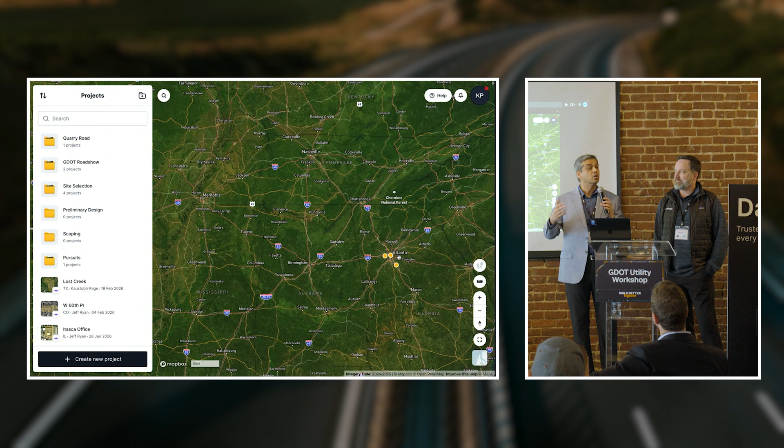We'll start by creating a new project. I heard about a long project in an earlier panel conversation, so I'm going to do a really long road project here. It's not an urban environment—we'll go to one, but this is more like a suburban, long linear project. Let's call it demo, and use this as a design phase for a road project.

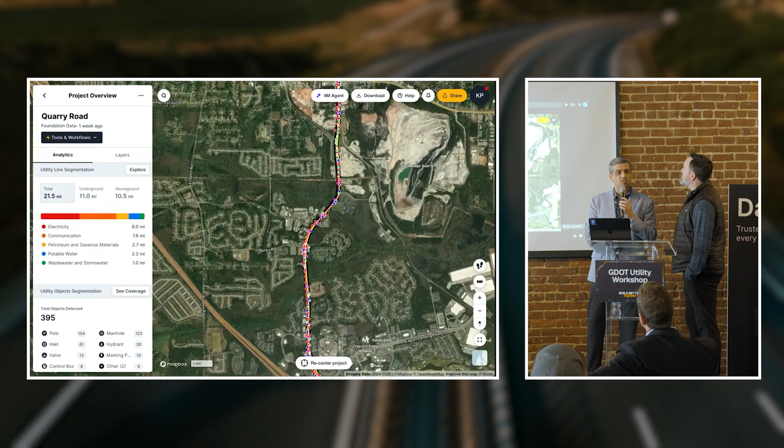Let's look at view utilities. Within a matter of seconds, our utility information starts streaming in, and we further enhance this data by applying advanced algorithms. If I switch to another window, this is how it will look within about an hour. If I zoom in, you can see we're streaming utility lines—different types of lines. For example, I can click here and see that's a wastewater line. Not only lines, but we also have on-surface objects.

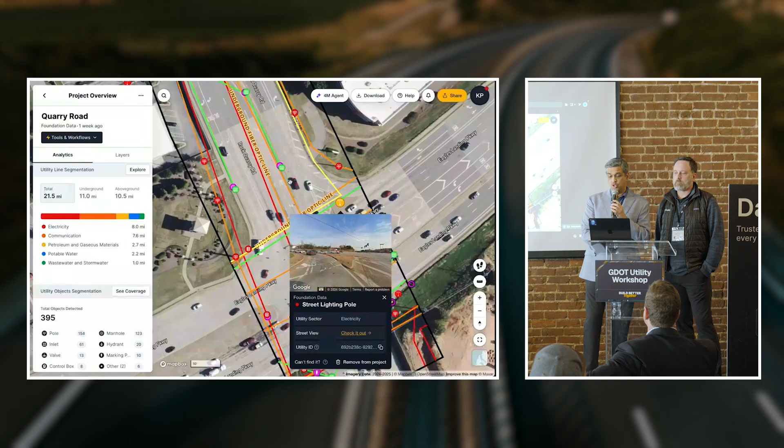So we have this particular pole that's been captured and geolocated. One thing is to identify an on-surface object, but another thing is to actually position that on a map, right?

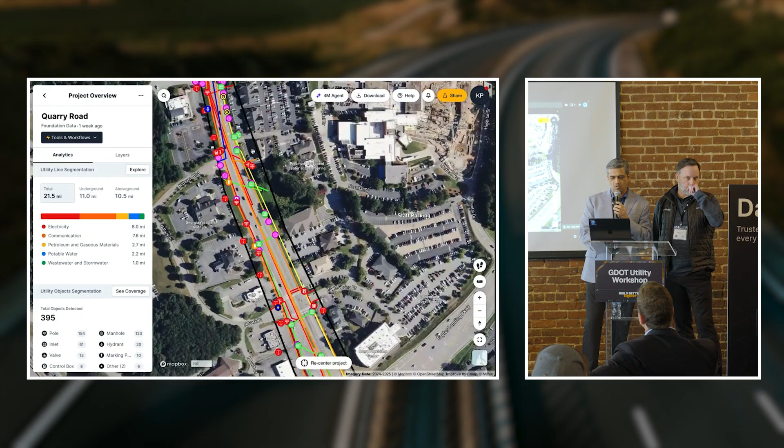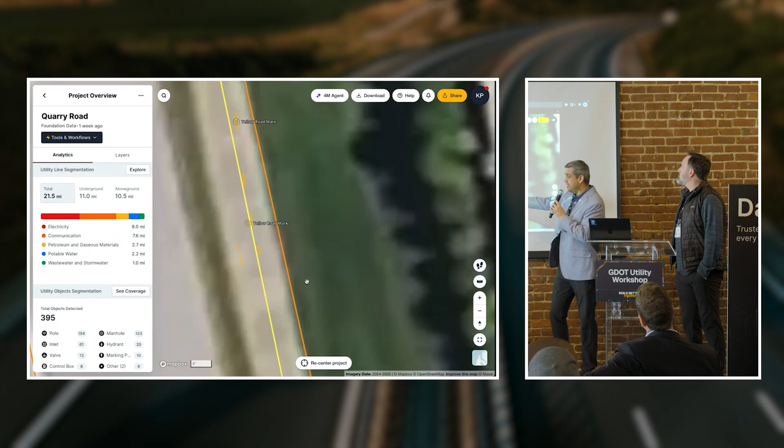Here are a couple of cool things I want to show you. If I zoom out and go to this area, not only are we identifying on-surface objects, but we're also capturing road marks. Here's spray paint, one of the locates you could see as evidence on the map. Not only can you see that in the imagery, but you can also see where it's located on the map. Here's a gas line we collected from our conflation engine. So for this line, as an engineer, I have strong confidence the line is present because I have evidence showing it is present.

We're giving you this level of information in a matter of 1 hour versus waiting for weeks and months. Let me go to utility insights on this one.

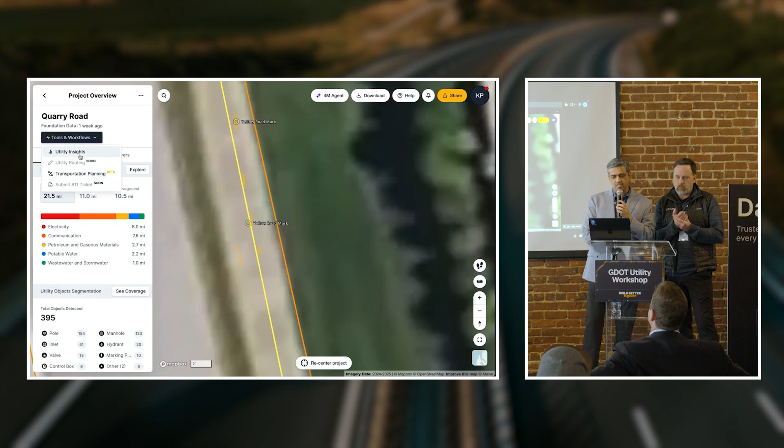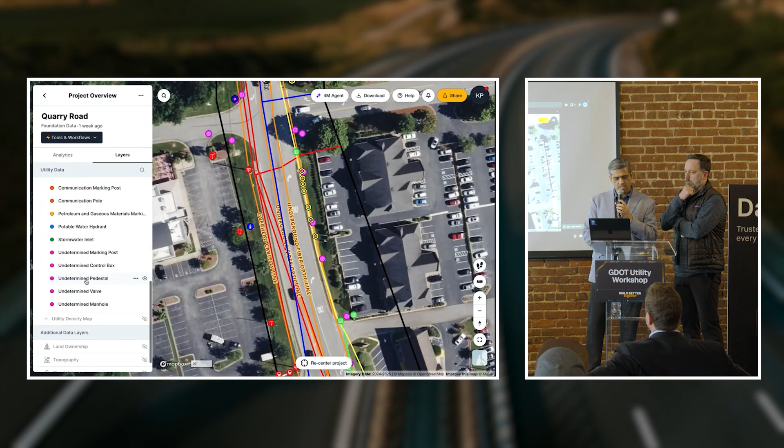Here's our risk analysis agent on this large project I've drawn. I just wanted to understand what the risks are, and our agent identified there's a parcel hospital in that area. If I were just cruising around, I might not know. So let's turn on that layer—let's turn on the land ownership. I did some preliminary investigation and found out that's the medical center.

So a very critical infrastructure—we know how the probable utilities are. If you're going to do any modification, as one of the panelists mentioned, making sure hospitals are correctly maintained and service is uninterrupted, having this information early in your planning and conceptual design is very critical. A lot of DOTs, including Nick's team, have been using the product to identify these risks early in the project concept stage, and in some situations we're seeing the use case evolve, now being used by emergency repair crews and others.

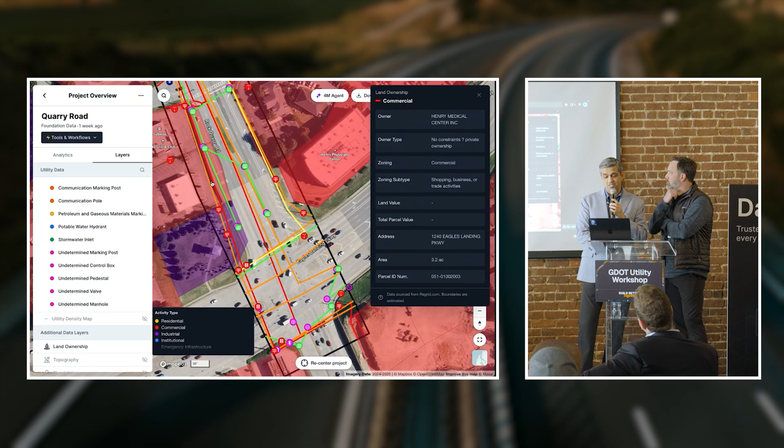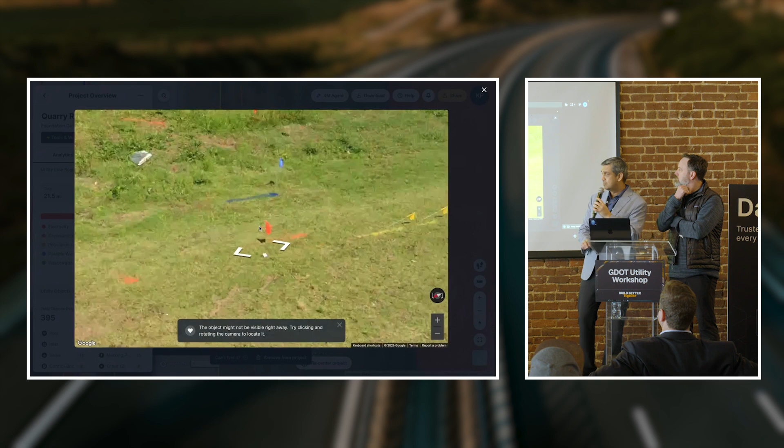So that's pretty much the product, and I wanted to show you a couple more things. As our product evolves, we're identifying more and more objects. Here's a new addition: not only are we identifying road marks, but we're also identifying flags—a small flag on the ground, not only identified through the image but geopositioned on the map. This is one of a kind—no product out there brings you GIS information plus utility objects plus markings all together.

In a month or so, we'll have historic road marks and historic flags going back 10, 15 years. Imagine the maturity and richness of data at your fingertips, at a fraction of the cost compared to doing a full survey, using AI. I think Gen Zs will like this product a lot, that's my guess.

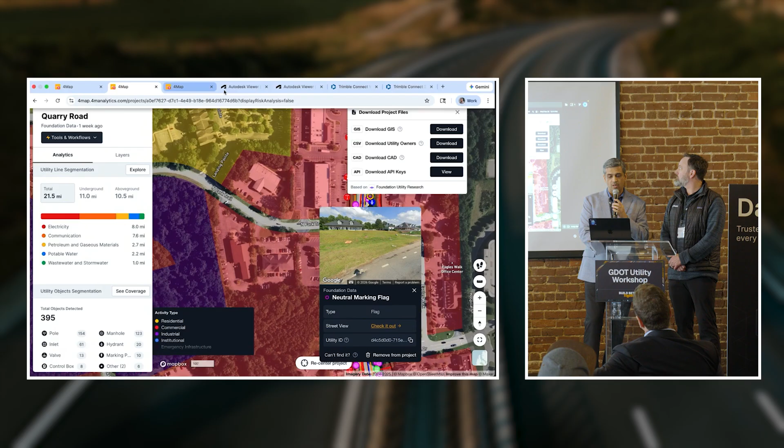On top of the data, we also have a bunch of other options—for example, downloading this to a CAD environment. I can instantly generate a DWG or DGN file that can be taken into design. Again, this is initial exploration; we're not saying start excavating based on this, but start communicating based on this information. So we're working with partners like Bentley, Trimble, Esri, and Autodesk to make sure our data is well integrated into other platforms.

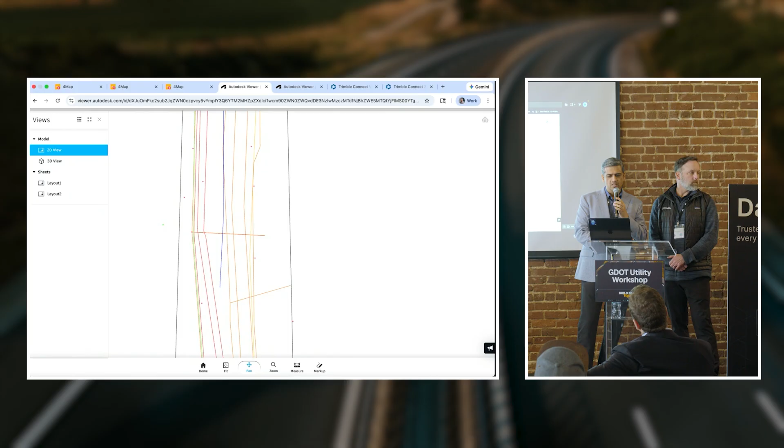Now let's try something on that field investigation use case. What we've developed is an API key, so I'm going to generate a new API key.

Everything is live, so let's see how it works. I'm going to choose a specific folder instead of everything, just a specific folder for Roadshow. I'll put an expiration date for that key, end of next month, so the data doesn't keep streaming for eternity. I'm just going to publish this WFS. What this is doing is creating a publishing stream only for a couple of projects within a folder, not your entire account that's getting streamed.

And now we can copy that, and I'm going to hand it to Darren to show how it works on the Trimble side. Thank you.

What we're looking at now is a platform called Trimble Connect, our collaboration platform. It's the center point between our physical and digital worlds. Trimble's uniquely positioned to speak both languages because we have tools in the field, GNSS equipment, equipment on tractors, excavators, graders, and software in the office that takes that information, generates grading files for those tractors to operate on, survey construction tools. At the center of all that is this collaboration platform called Trimble Connect. One of the really key things about Trimble Connect is it's an open architecture, so we have APIs that we can collaborate and communicate bidirectionally with your systems of record or products like what 4M is offering.

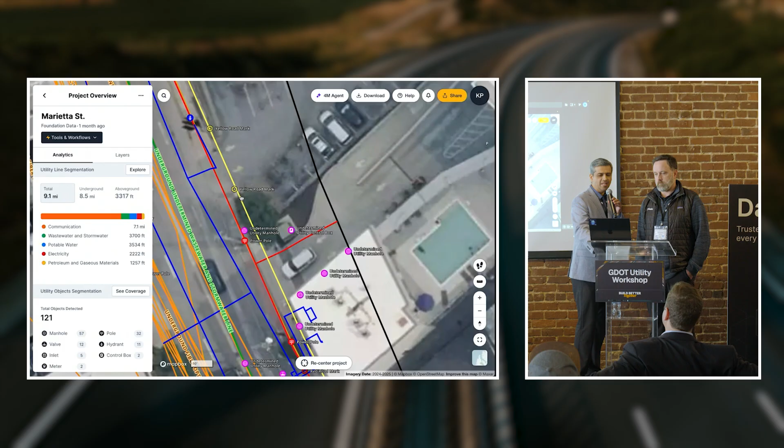Before that, just one thing we want to quickly show is how that project looks in 4M. This is the location where we map that project in 4M. You can see all the richness of the data. You can see the gas line over here, click on that, and find all the information. Same thing, you can find the road marks. You can identify and verify a lot of this information.

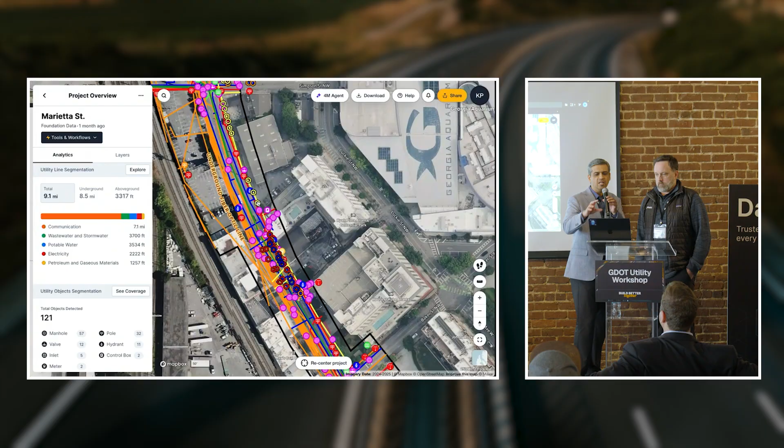What Darren will show you in a moment is taking this information and streaming that on the Trimble side. Sorry. That's a key point, I know. We practiced this before, but you always forget something.

So I'm going to go select our project, we're right out here at Marietta Street. I'm going to give it a name, and I'm going to call it—if I can, I'm left-handed, so this is difficult. Do you want me to hold the mic for you? I got it. We're going to bring that data into Trimble Connect.

What this is going to allow us to do is take this data out into the field with us with the various Trimble tools, whether it's Trimble Access, our survey software, Trimble TerraFlex, our GIS data collection software, or what you're going to see in the field, Trimble SiteVision, an augmented reality solution. We'll be able to visualize not only the location of these lines, but also the depths of them in the field, as if we were uncovering the asphalt and the dirt and seeing those lines.

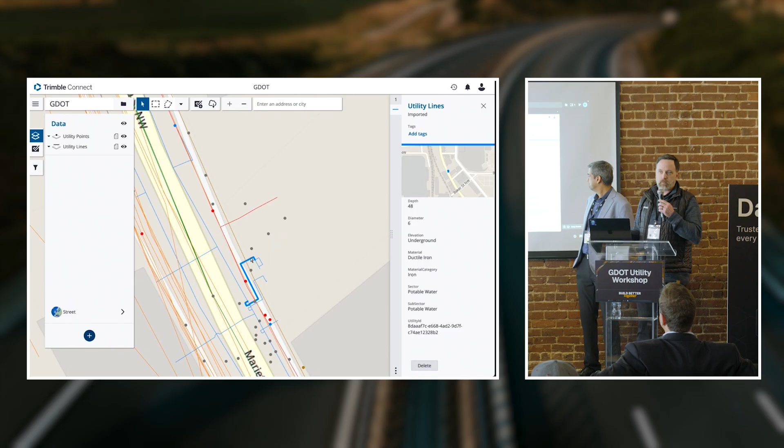So we're going to go here, and I called it—oh, go back one—GDOT. Yeah, there we go. This is, again, in Trimble Connect, which gives all of Trimble's tools access to this very rich data set that 4M is providing. I can zoom in here, and we can see it's the same data, the same attribution. I can click on any one of these lines and see all the data that's been collected in the 4M system.

For this initial exploration of this data set, it's good enough data—we're not digging trenches right now—but we're going to have a crew out in the field right now showing how, as soon as I've connected this in Trimble Connect, our field users immediately have access to this. So we're going to pass this over to our crew outside, Justin and Dan, and they can take it away.

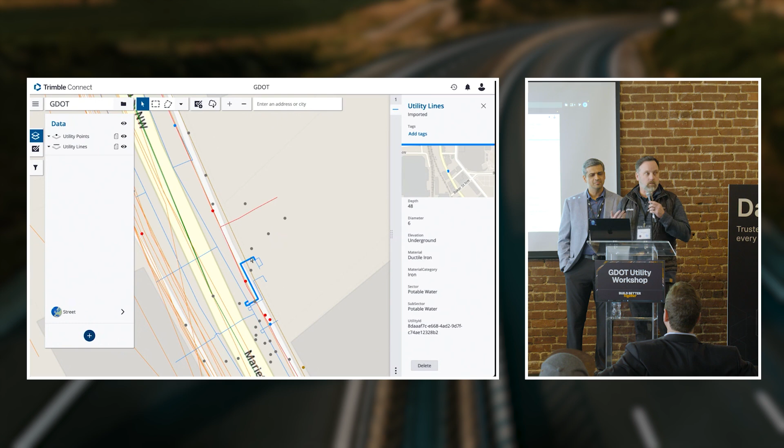There we go, I think perfect, we're live from the field. Hey, thanks for sending all that data through from Trimble Connect. What we're doing is we've loaded it into Trimble SiteVision here today, and our first order of business is just to take a couple of steps with the data loaded and get it to orient to kind of where we're at in the world.

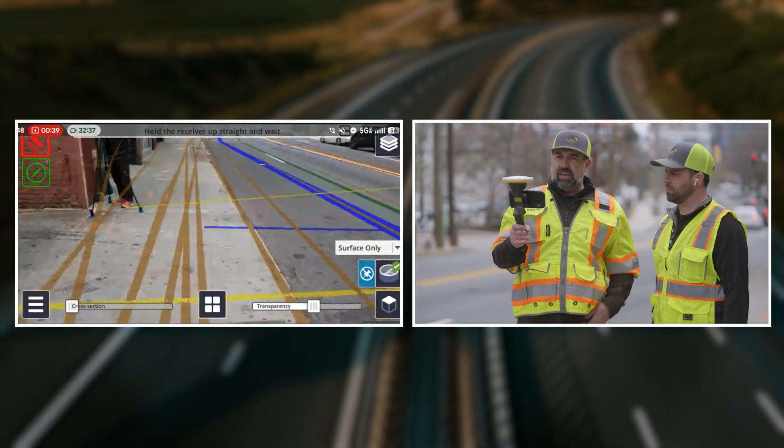And as you can see, as I've walked, the data has all automatically been placed based on the data that originated in 4M is now in Connect. And now we're going to take this data and put it to work with an initial field investigation.

So we have, do you want to show where it goes into the building? You can see this gas line here that goes into the building as well. And then we have some fresh paint marks, but it doesn't really tell the whole story that you see with the data. Once you get the data, you can tell, as we plan a construction project here, there's just not the room to relocate any more utilities over in this area.

So that's something that we can see right away, right when we get to the field, whether there's been an 811 done or not, to get us going right away.

And some interesting things about the technology here is that all of the data is overlaid on the surface, and you can see that. If I change the transparency, you can get an idea of the fiber lines that were identified in the database and their orientation based on the paint evidence that we've got on the ground here. And we can take different views of this, things like a pit view, so we can get a look here as we walk across the street of all the utilities in the right-of-way.

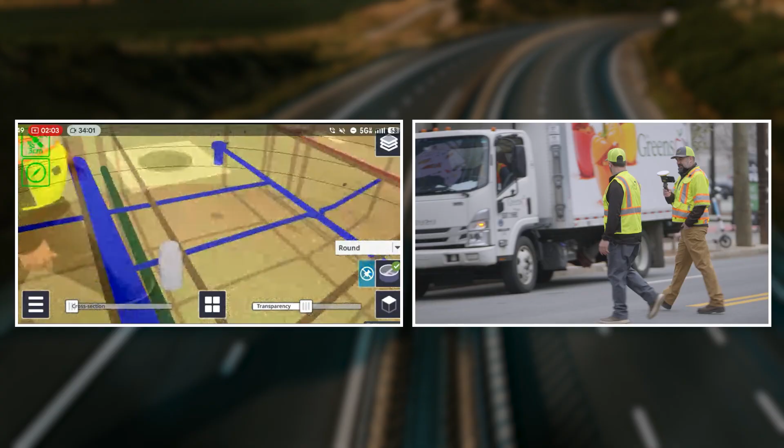I'm going to try to not get run over by a car while we do this. All good here.

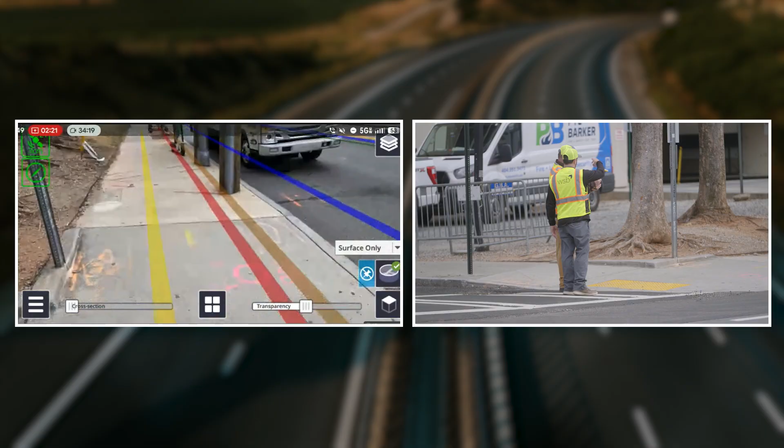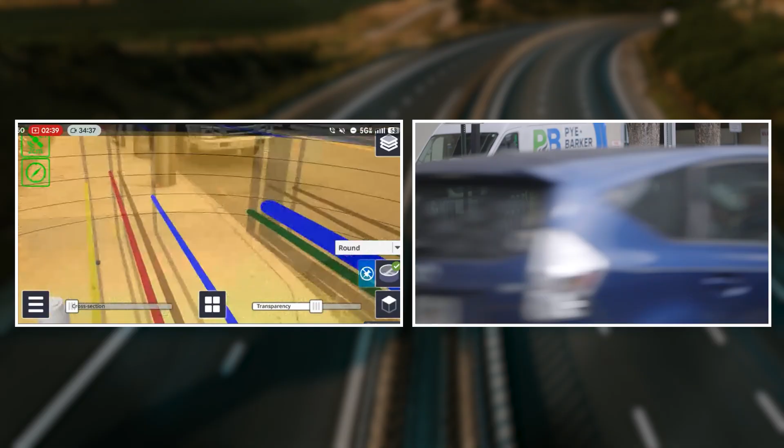We'll flip back and get an idea of more of the utilities here. As we look around, you can see the gas line mark. That's one of the concerns that needs to be relocated. As we can see on the other side, there isn't room. So as we think about this process, it's probably something that needs to be relocated within the road core, potentially, or adjusted, worked around in the field, things like that.

So we'll definitely want more data on the gas line. As we turn, we can see evidence of water, but we don't have any marks out in the field. That's where having this data is so valuable right off the bat, because we can see that there's water lines going through here. So we can add that into our planning just from our initial investigation here.

So in standard demo fashion, we've got a little bit of a freeze here, but there we go. We got everything caught back up.

But SiteVision gives you all kinds of different views on it. You saw the underground view through like a pit view to give you an idea of the vertical separation between utilities, the relative size of utilities from the attribution. We get an idea of larger diameter water or stormwater, so we get an idea of the large utilities that might cause concern or a heightened risk.

In a particular project, Dan, can you just pause at that view for a second? Here you could see the communication marking on the road. Again, from an accuracy perspective, it might not be at inch-level accuracy. Doesn't matter, it's an initial exploration. You can see that evidence, you can see where the 4M lines are. And that gives you an idea, as both of them were saying, hey, if you're going to modify this sidewalk, it has a fiber line risk versus that sidewalk has a gas risk, right? Understanding that is key.

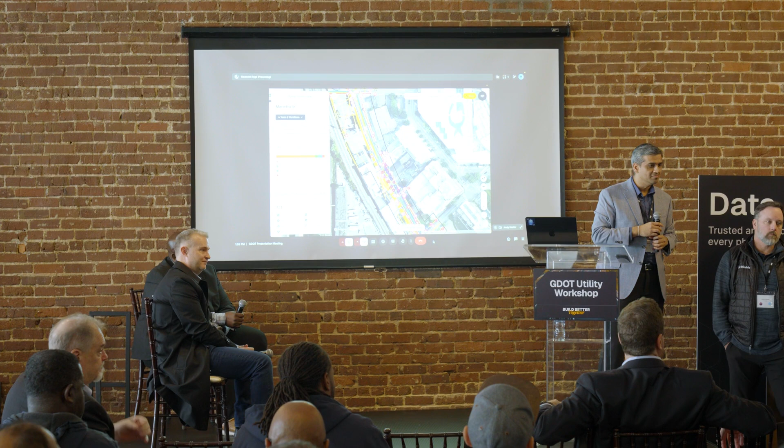Justin: hey, let me piggyback off Aiden. So the marking in the field indicated a duct bank. When it's flagged in 4M, is it just going to say telecom, or would it say duct bank telecom? As of now it just says telecom. It doesn't go to that level of duct bank telecom, but that's something it absolutely can.

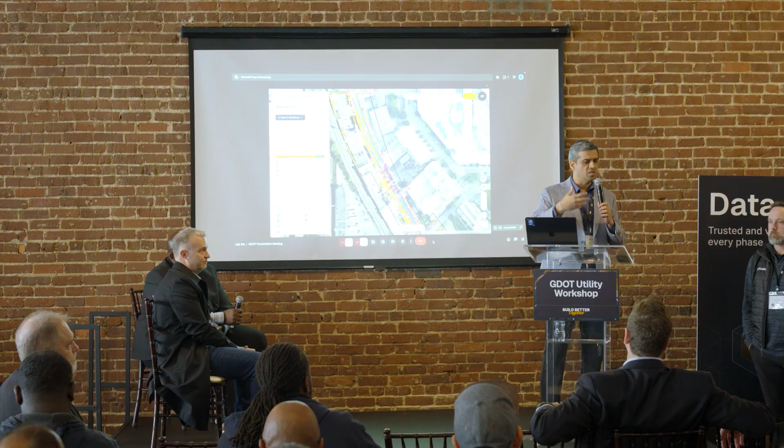So yes, 100%, that's what we're working on. As I was showing you, we have markers and flags now, and our vision and mission is to continuously understand the markings and physical evidences on the ground. So duct bank will be something we'll work towards.

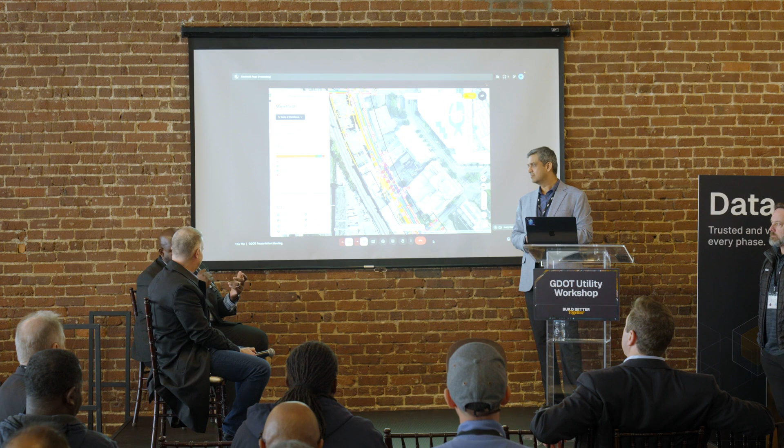I think that's the beauty of SiteVision. If I'm outside, I can see AT&T's vault right there in front of me. You're able to connect the real world, what you see on the ground, with what you see in 4M. It's not hard for the mind to do that deductive reasoning, like 'oh man, this is a vault here,' whether that was part of the initial attributes or not.

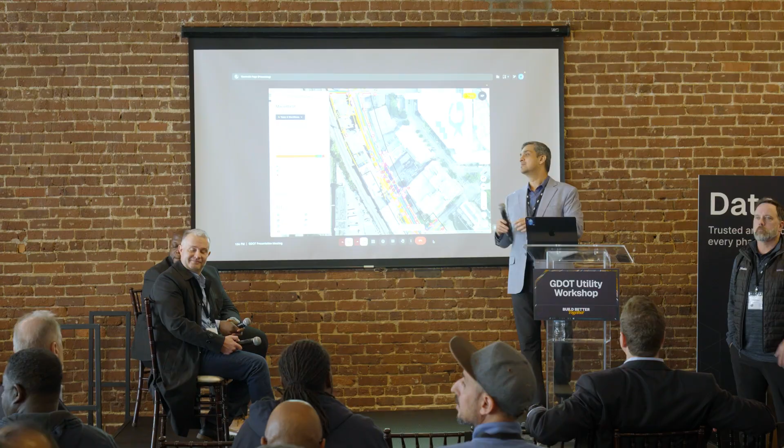All right, quick question. When you're looking at bringing all this data into one central visual location, are you able to bring in multiple data sets that overlay on top of each other to produce this product? Or does everything have to be merged into one solid data set?

Great question. Actually that's the exact use case with many DOTs we're working on. They have their own as-builts, easements, and other data layers. Soon you'll see this fully productionalized in the product, meaning you just point to where the data sets are, and we'll pre-process that data — and there are different complexities of data, right?

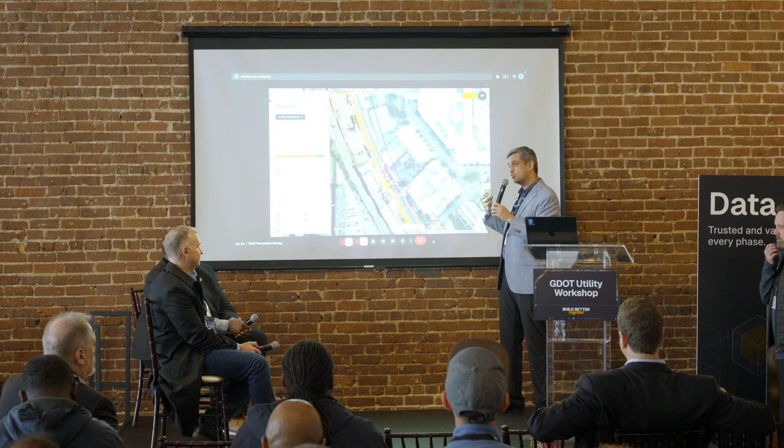For example, permit as-builts: some are literally close to a hand-drawn sketch — it'll be a CAD drawing but with no GPS or GIS reference. But some are really good. For the crude ones, we'll just show that as a point on a map, saying here's a document reference we can provide you. For the ones where we can actually extract the lines and put them on a map, we'll do so. So the product is evolving exactly in that direction.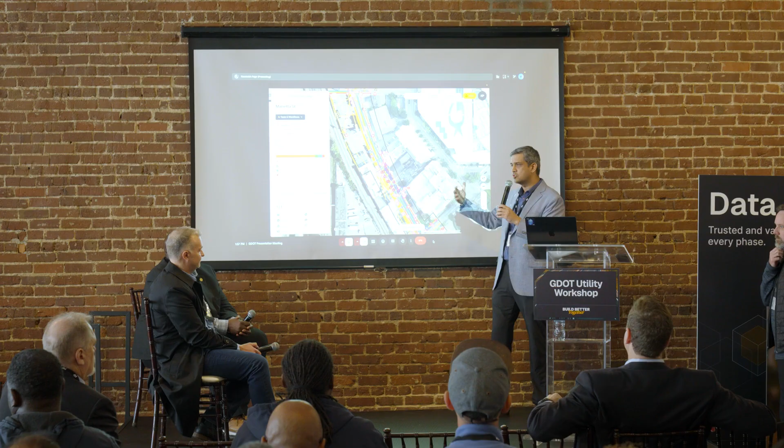We'll have additional layers for organization-specific data that you can bring in, plus the data processing we'll do. Great question, by the way.

How does the Bentley interface with this program? So right now the Bentley interface is one directional, meaning the data from our application is going out as a DGN, 2D DGN to begin with. So Caltrans is using that 2D DGN in their workflow.

But going into next quarter, we are building a 3D connector with Bentley. So data from here, just like what you saw in SiteVision, we will assume depths in some situations where we don't know what depths are. This will generate an iTwin 3D model that you can take into iTwin and put with other BIM information to look at a comprehensive picture. That's the unidirectional flow we will work on.

Going forward, here's how I see it. I've worked at Bentley for 15 plus years, so that's a topic dear to me. We will see integration with Bentley design tools going forward as our partnership matures further. So within a Bentley tool, that's our vision - you should be able to fetch the lines, or even send your design information to 4M for utility coordination, conflict matrix, and so on.

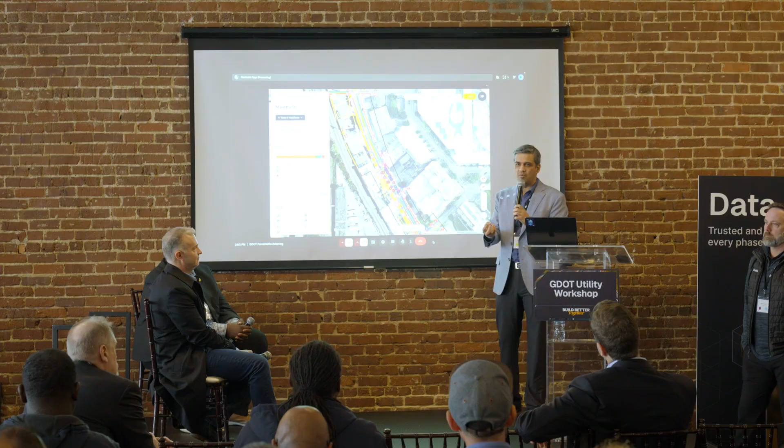It depends on what the location is, what type of utilities, and whether there was a recent DOT project where we get high quality data from, say, a bid that was put out. If a bid was put out, our engine will go process that and update the lines, so the accuracy of lines in that region will be relatively higher. That's why we're not relying on only one data source, but giving the visual evidences, the road marks, and all of that to bring comprehensiveness. So, sorry, the answer is it depends.

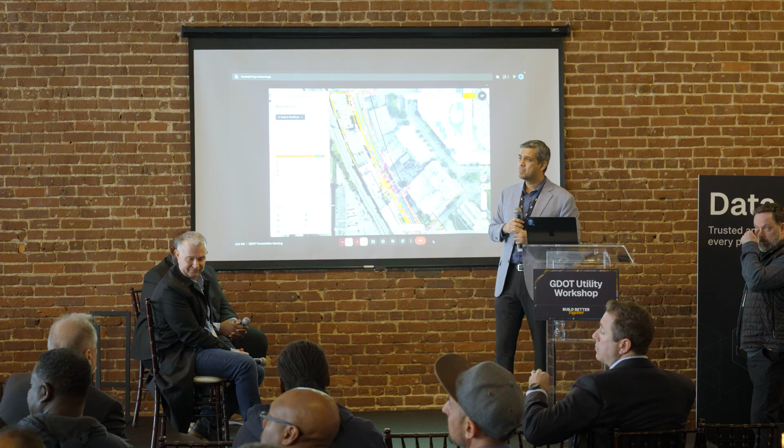I've got a question. The Public Service Commission for Georgia is the enforcement arm of the dig law, and they have a requirement called the marking standards - a uniform way that everybody locates everything. Like the conduit run marks you guys showed before, it was 2 lines and a dot. In South Georgia, they were putting a diamond in the center, which was also a correct way to mark it - a line and a dot. But one of the other requirements is to identify the utility you're locating, using the acronym for that service area, so AT&T.

AT&T - it's supposed to be marked on the ground. I know we're just talking about your records, and you don't have that kind of requirement here, but downtown Atlanta probably has 6 or 7 telecommunications providers easily right outside this door. Throw cable TV in there too because they're part of telecom. So I don't know if you could augment for DOT's sake - that might be something that could help.

Yeah, that's a great question, and we see so much variation, not just within a state but across states, in different ways of marking things. Some states have strict rules of marking the utility owner on the road marks itself. Our AI engine is constantly learning, and every single quarter there is more and more data that we are understanding. Sometimes the writing is not legible, but we are continuously training our AI to not just identify road marks, but to synthesize that road mark, identify if that's a duct bank, identify which are owners. That's the exact direction the product will evolve.

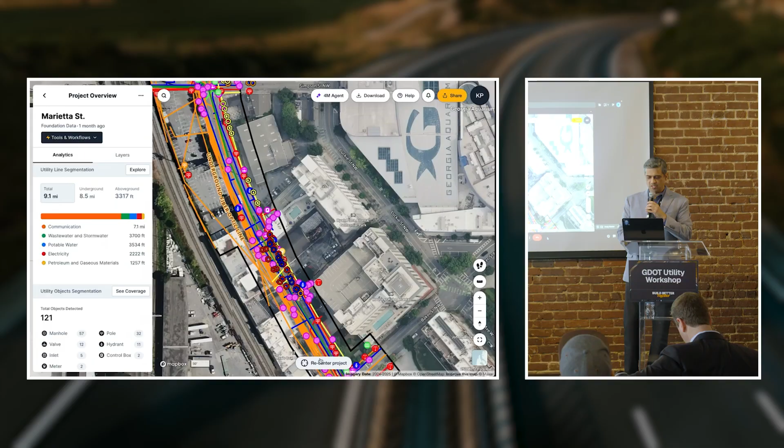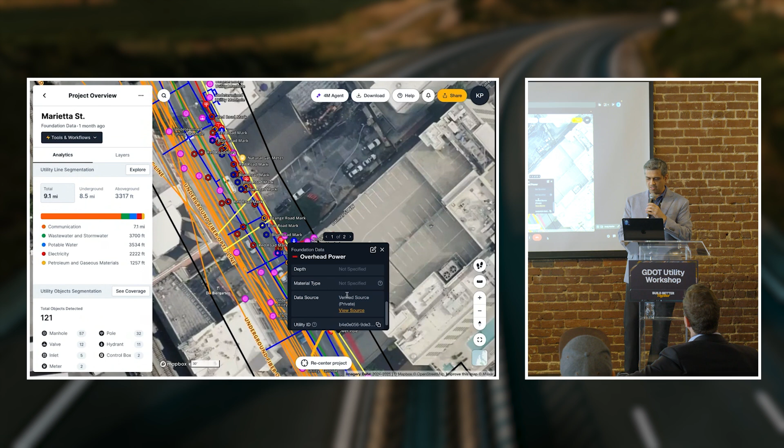You mentioned different levels of confidence in the line work. Is there a way to show or display the data origin of the line work that is placed? Great question. We try to do our best, because we are processing many documents all together. Sometimes we will be able to show a clear data set - most of this is private or 4M generated data set.

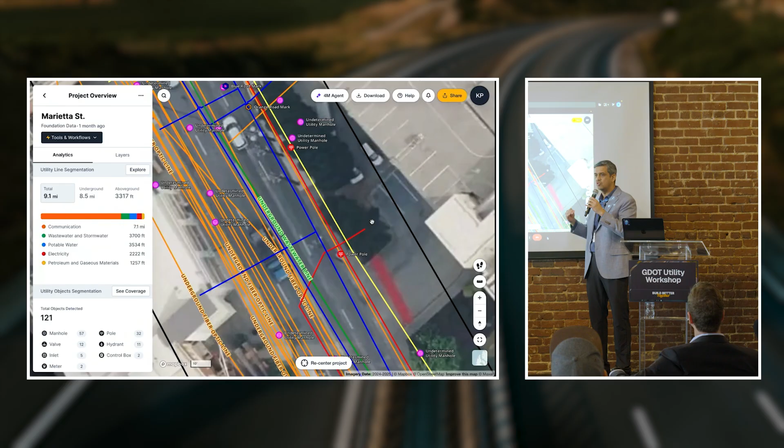But yes, wherever we can, for example here, this is coming from City of Atlanta's public records. Here are the lines that we pulled. That doesn't mean these are all the lines we have, but we will be able to show you how it's been pulled. One of the challenges we face, as Justin talked about with Project Manhattan, our internal project, is that as we go into more AI application for line generation, many of the lines will be 4M generated, but we will back that up with evidence on the ground - hard evidence saying here's why we think a line exists, because of an on-surface object, a road mark, or because we see a similar pattern at the intersection down the road. So our AI will give you the reasoning, so you'll have better confidence in the data we are providing.

Yeah, I was kind of going in that same space. I was going to ask, is there a way that you communicate your level of confidence in each line or the overall output file? I didn't know if y'all assigned a score to each line that y'all output, or if it's just here's the supporting documents and you decide if it's out there or not.

Actually, me and my manager, Amir, were discussing this the other week - in the demonstration I was showing you, there is a way to assign a score. So that's where the product will also evolve. Again, we want to build this product together in partnership with DOTs and with industry. So we don't want to come out and say this is a 4M score - no, that's not how it works. We want to understand how we can better assign scores so that we as a community have better confidence in the data we're showing. Great point.

And just to add to that, preparing for this live demo - we don't know, based on 4M's data, they generated a lot of it themselves, but they also source it from public records and other paper maps and everything. We don't know the coordinate systems of that original data, the datums they were in, if they were transformed into any other datums. So getting that all aligned, it's super important to know the lineage of that data you're trying to represent in a 3D real life situation.

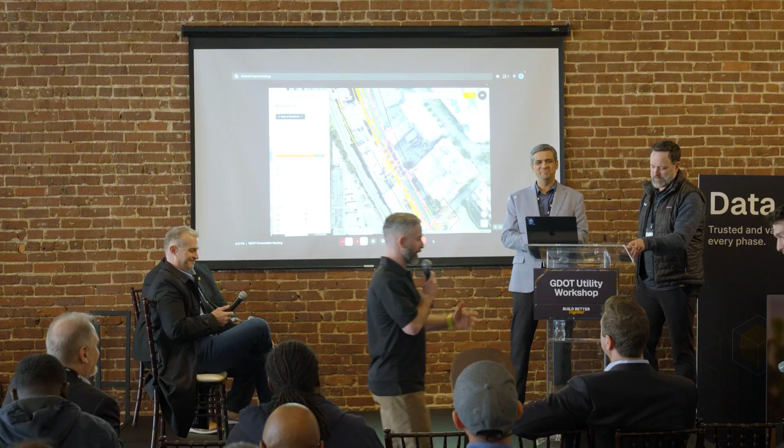Okay. Roz, thanks for that question, but we have two scenes here, and that's part of scene 2. So, Ed's kind of spilled the beans a little bit, but as you guys have seen, a field investigation was done properly to get an idea of what are some of the complexities that we're going to run into and give some early guidance on what is feasible for this project. Okay, so scene 2 starts now.

Go. All right, so Nick, we got the initial investigation done, right? We got some fun challenges in your right-of-way that we got to look at. But we do have that early conceptual design. Do you want to take a look at what those utilities and that conceptual design look like together? Yeah sure, but my wife walks in during scene 2. I'm kidding, okay. Sorry Justin, I did that for you, man.

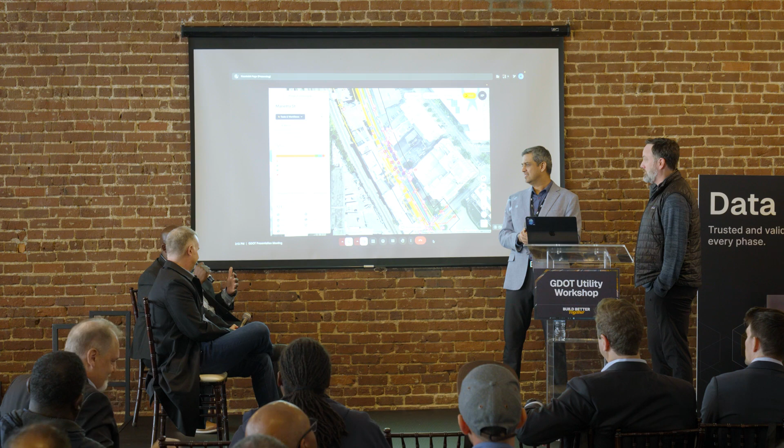Yeah, no, so first and foremost, of course we got a complicated situation here. We've got, in essence, a situation where we're going to be setting curb and gutter back, which potentially creates a conflict with drainage.

As with many cities, the city of Atlanta would like to improve aesthetics, and so we've got a pole line that's under consideration for undergrounding.

I saw Galen somewhere in here. Just please don't comment to that, Galen.

But the thought process is to underground. And so when you've got gas mains that are conflicting with potential drainage, you've got the undergrounding of a major utility that's currently aerial, it's going to present immediate challenges.

So I think first and foremost, we'd have to strategize on where we can make adjustments based on the current setback that we see. I think we'll have to take a look at whether or not undergrounding utilities is feasible in this corridor, or we need to consider reroutes. I think we'll have to take a look at what's really abandoned and what's really active in the corridor, because we really don't have the room to introduce any additional congestion.

So in addition to the gas main that the guys were taking a look at across the street, it's definitely, there's a high potential that's going to be in conflict with the drainage.

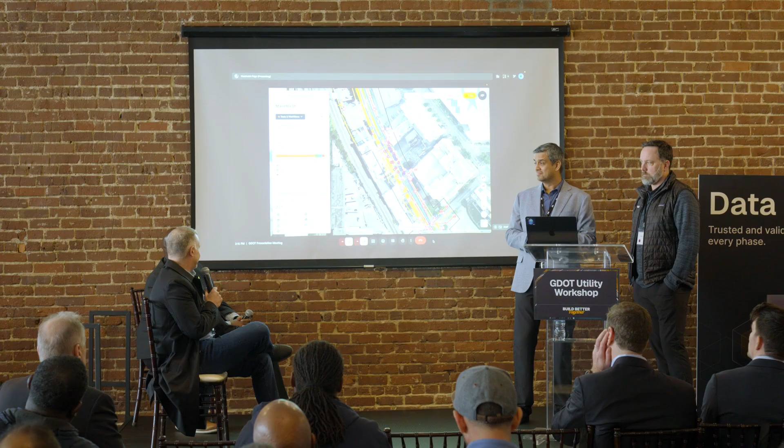Great, yeah, and we can't forget about our contractor community. We probably should also look out if there are any particularly large assets we got to deal with. That's what the contractor is going to want to know about. So we'll also look at any particular large assets, because those are always the most challenging for our contractors.

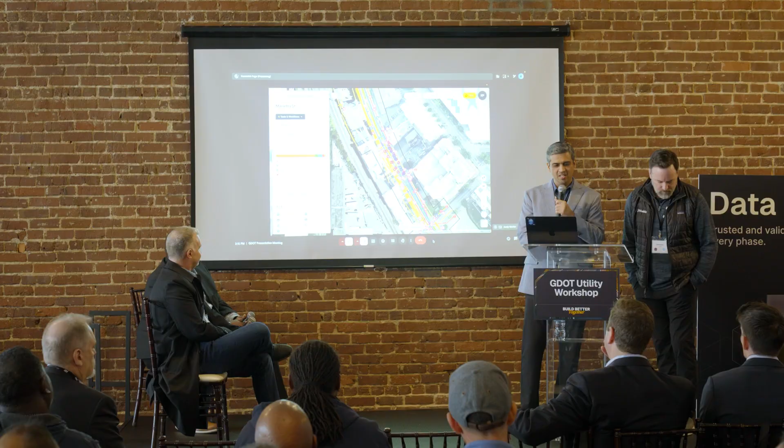Great. So with this setting, let's again jump back to the product. For large assets, we could find those type of assets from over here. So there are a few water lines exceeding 20-inch diameter. You may want to go and look at that.

In terms of now the next evolution of the investigation, we can start looking at land ownership. This is something we also saw in the previous project. We can click on a particular parcel. We can see who owns the parcel, what is the parcel type. Looks like this is a parking with land value and the parcel value explained over there.

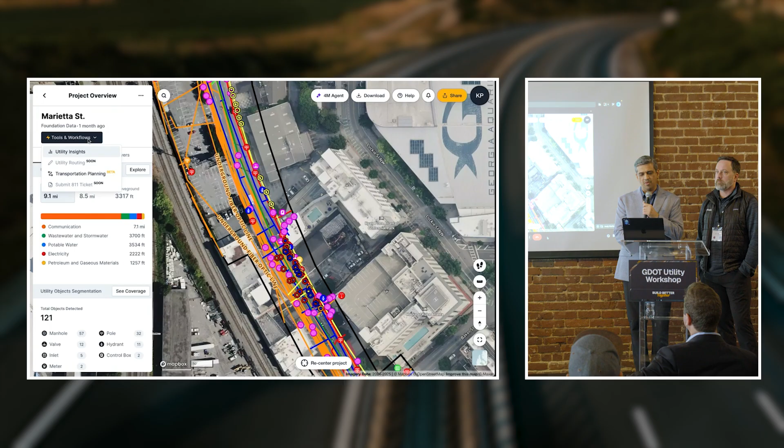What I'm going to demonstrate now is one of the features for the transportation planning. So back to that question about Bentley, this is before even the design is available. This is where you are just thinking, hey, I want to go and modify this side of the road, so I don't have the final design, but I just know a probable area.

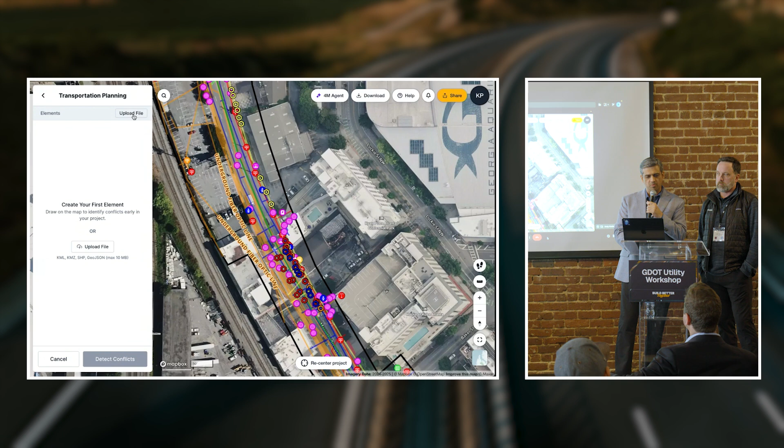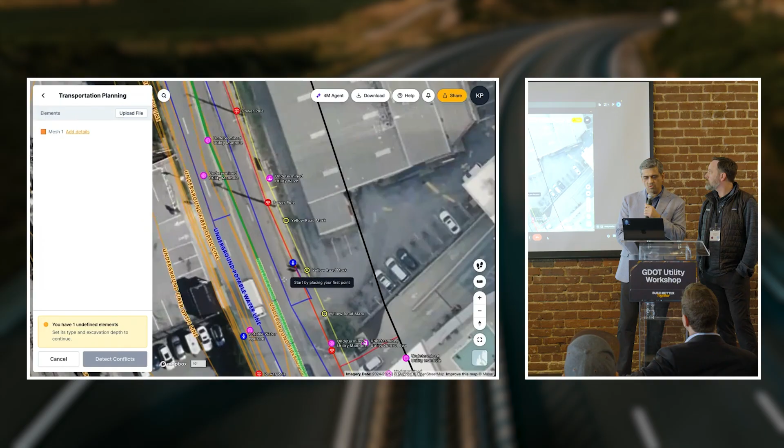So here, what we can do is upload. I'm going to start with uploading a KMZ or GeoJSON file in this situation. So here's a polygon that I've uploaded. But I can also go in and draw, for example. I can go over here and say, this area is also an area of my interest.

And then select a type. This is road. This is going to be expansion. I'm just going to name it expansion 1. We're going to do 8 feet undergrounding over here. And then for the mesh 1, I'm going to also call it a road. Expansion 2 for this one. Again, 8 feet. Continue. Detect conflicts.

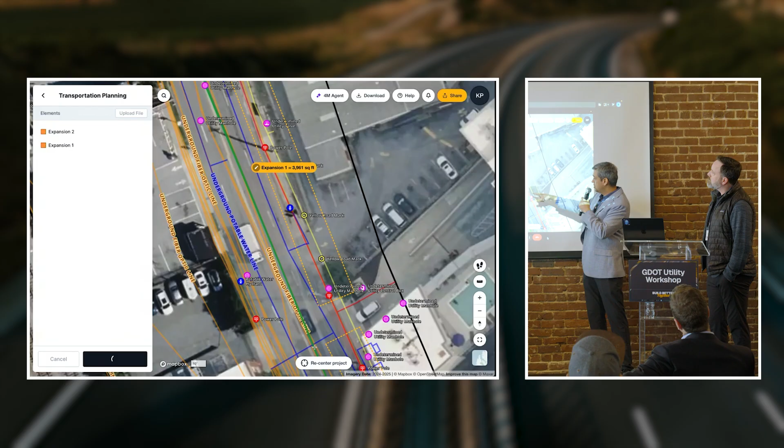Here are a few depths that you can provide, just a range of depths. And now what we are going through is we are creating like a monday.com type of list for you, like a to-do list, which are the utilities within the given polygon. And you can define those polygons by different names. So here's that list of things within that particular polygon that we have drawn, the description, the location of a conflict, so on and so forth.

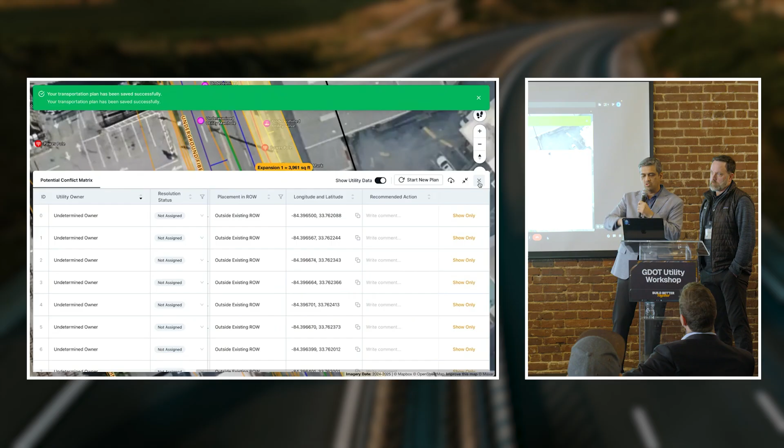So you can take this list as an initial starting point and go on to the 3D design and go on to further coordination. So with that, I'm going to hand it to Darren to talk about the 3D part.

Were you going to show your 3D model first? No, okay. All right. So again, Trimble Connect supports many different industry standard file formats. And even more importantly, through its APIs, we can connect directly to databases.

So there's not this file sharing, because everyone knows as soon as you create a file, it's out of date, right? But if we can connect directly to a database, then we're actually looking at the same data at the same time. One of the connectors we have is with Esri, so we can stream into Esri database, Esri features in real time, update those and push those back, all in the feature services architecture.

So this was a model built in Bentley, okay, by WSP. So again, full 3D model, visualization, buried utilities, above ground sidewalks, power lines, power poles, etc.

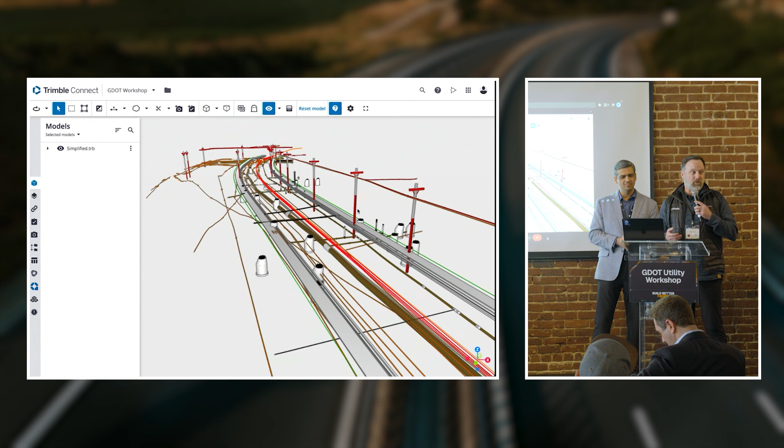What we're going to do again is push this out to the field. Well, now it's already loaded in Connect, so it's already available to our crew in the field.

This is a little asterisk. We didn't do a preliminary survey out there. This is a very generous model that our friends created for us on the fly, so it's a mock-up of this proposed data. Keep that in mind when visualizing it in the field with these guys, because we would really need tight control to have this thing fit perfectly, and we just didn't have that completed.

So out to the guys in the... Can I add one more point? Yeah, so by the way, kudos to WSP. They turned around this model in a matter of a day or something like that.

Amazing job. What these guys have developed is their internal script, which runs in OpenRoads, which takes 4M data and converts that to a 3D model like this. It takes the utility objects that we've identified and assigns features in the Bentley tool, so they don't simply show as a 3D object like a cylinder, but with actual features and connectivity and so on. These guys have done an amazing job with that.

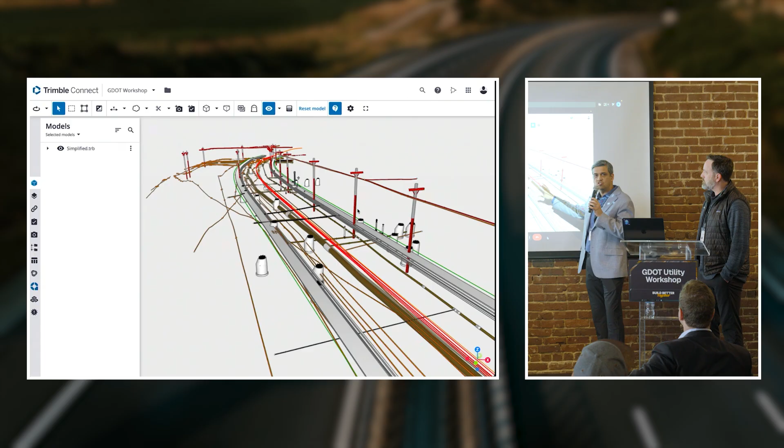I think you are exploring with many DOTs in the early concept design how to take this 3D data, identify conflicts, and avoid conflicts even going into the design. It's a completely revolutionary way of approaching transportation projects. So once again, kudos to WSP before we hand it out to the site.

Our team out there, if they see any additional conflicts, can note that, and office workers would be able to see that immediately and adjust their model as necessary. So this is near real-time communication between the field and the office, the physical and the digital. With that, let's hand it off to the field crew.

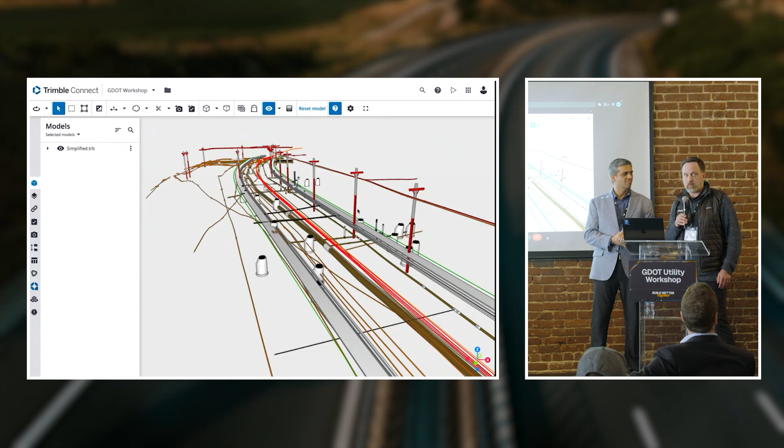So what we want to demonstrate here is the ability to take that model that WSP just created, just to show you guys everything that we can get with the 4M data and the conflicts that we see. As you look up the road, you can see with those mocked-in manholes, the fiber line is going to be an issue. But we can also see in these models any info.

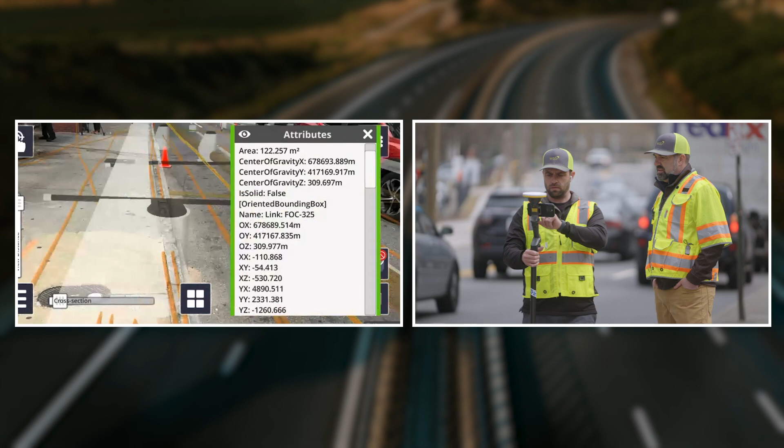Just by selecting, it'll keep that data as you move around. This helps make that decision right away in the field if our preliminary design is going to work or if there's going to be conflicts, right? We'd also see that in the office with a 3D model design.

I think that's all we have to show on the model side, right? As the models get more complex, we have the ability to turn on and off certain components of the model, so we can visualize only those pieces that we want to see at a time. We've got it all built and baked into one model at the moment, but the more complex and properly done models give us a better view of exactly what we want to focus on when we're out in the field.

The fact that you can bring this model, not just a paper plan, but walk the model and communicate with project stakeholders, whether it's the contractors, setting up a laydown properly, or dealing with a dangerous utility, there's lots and lots of context to be gained from using a model in SiteVision overlaid on the real world.

Yeah, and I would add, one of the things we see value in is safety. WSP does a lot of data prep for machine control contractors out there using, let's say, an excavation plan. A lot of our contractors will ask us to take a similar view but add in their excavation plan and data set, so they can look at how their excavation is going to overlay with existing conditions against that design. So contractors are also seeing value in looking at it this way.